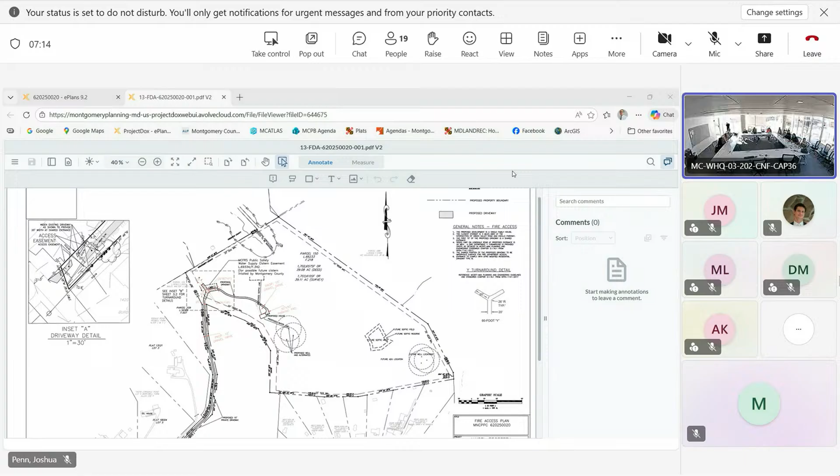There was a handful of comments, I guess, Marco, to go over and address as best as we can today. And then if we need to meet afterward or set up another meeting, that'd be great. I think I have it distilled down to maybe two or three big picture comments. One being the access easement from Frederick County that is currently used for the property, and then the area we were proposing to carve out of the conservation easement for a future potential ADU. So those two items - can we go to the forest conservation plan? Maybe that's the best way to go on this.

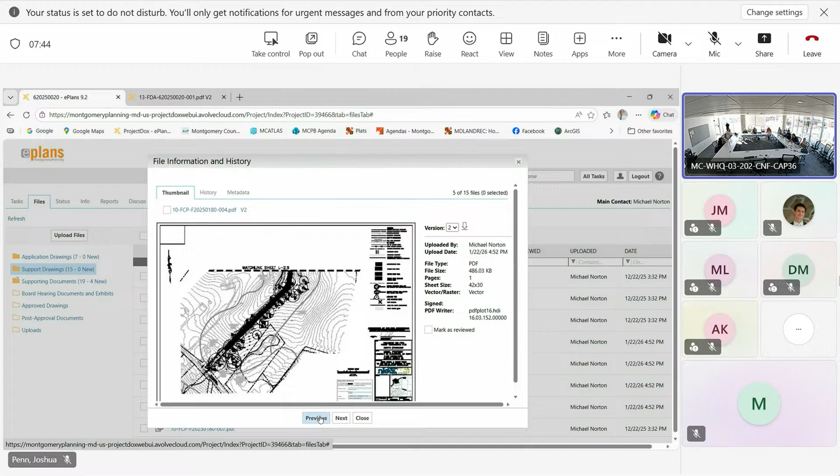Yeah, no problem. And I guess just while the plans are being pulled up, it might be sheet 3, if I had to guess. Sheet 4 then. No, I thought I had an overall in there that I wanted to use, but it's such a big property. Right here. So that looks...

Yeah, maybe. What we're looking at - it looks like, as best we can tell, there's not a problem with using the pipe stem as we have, but the concern comes in on the top north corner of the property, the access easement and forest, and potentially reforesting or putting that into an easement area. Is that...?

Well, at this point, there was something to this effect in the comments. It wasn't clear which of the two, or potentially both, would be supported. There's just not enough information provided yet. Okay, ideally there'd be one. Potentially you could justify two, but you would need to. We don't have a problem with the one that we have shown, which would be the pipe stem coming off of Lewisdale Road.

As we have shown, we're not proposing access from the easement from Frederick County. Would you, so you're saying you'd be willing to close that off? And if it would allow us to move forward, the owners would be willing to close that off. We spoke yesterday and they're fine with foresting that area, foresting the stream buffer that's on Montgomery County property. That's not a concern, we can definitely close that off. I guess that's one of the big comments that we have to work through or get some feedback from you.

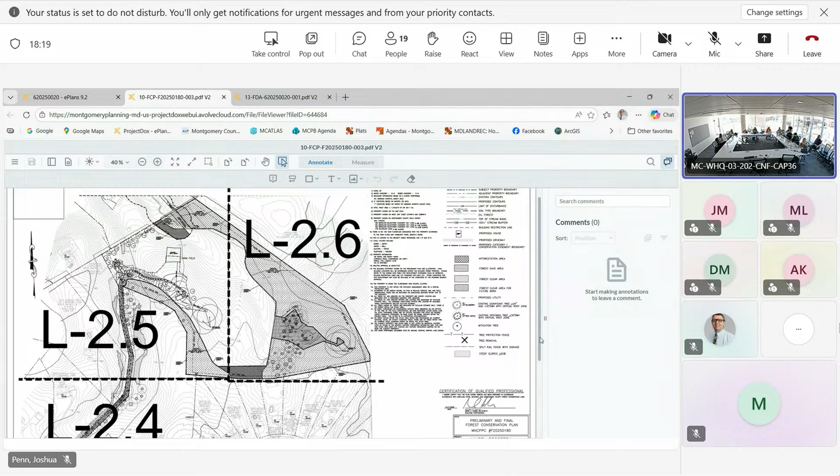I think that leaves us with the one entrance. We would like to retain the entrance that we are showing on the pipe stem. That brings up a couple of items that I'm trying to work through. We will set up the meeting with Rustic Roads and talk with them. I think, Jonathan, you had a comment about possibly doing a shared driveway.

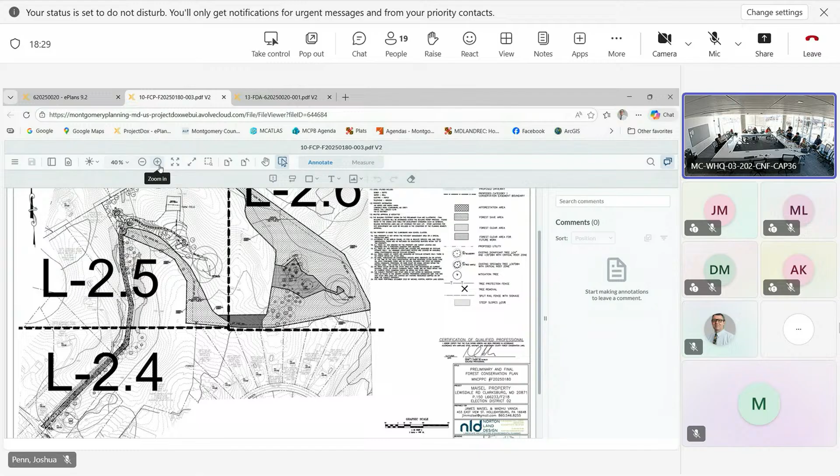Yeah, there's something on the adjacent plat that showed it was the access for this property, kind of stubs here - or sorry, this one stubs here, this one goes all the way to the road. But then it shows on the plat like a future 60-foot right of way. I don't know if that was back in the 80s when they were maybe looking at doing a bigger subdivision, is what I'm guessing.

I don't know that we could go and put the driveway on the neighbor's property to widen that, because I believe their driveway is 19, 20 feet from our driveway as we have it shown right now. So we'd have to somehow do the driveway on their property. You're talking about you would have to expand the driveway? Well, we'd have to completely move the driveway off of their property and put it onto the neighbor's property as a shared 20-foot wide driveway.

So we really would prefer not to do that. We are straightening out quite a few driveways at the entrances. It seems like everyone's driveway is on everyone's property when you look at the front of it. I think some of the circle driveways actually extend onto this property. That is why we're showing it 20 feet wide up in the front for fire code requirements, versus going to the neighbors and telling them to please remove all their driveways off of this property. So we'd like to keep that as clean as possible with a single driveway going back to this property.

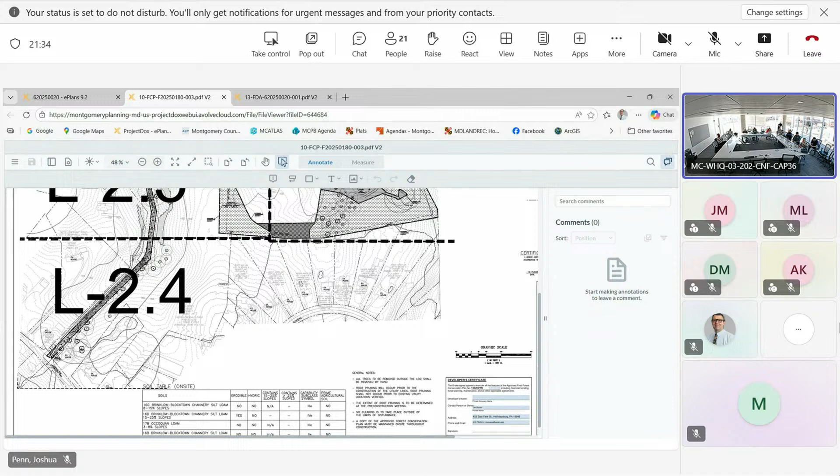That brings up one other question, and Marie is on the call right now. What I'm still getting turned around on this particular property is, it's been a long time since we talked to you originally on this, because we were ready for approval before we decided to go back to more testing on the property. When we did that, the code requirement changed - that requires now a cistern on the property instead of the easement. Correct, as of December 24th, easements are not acceptable for actual water supply installation.

So I want to go back to this for one second, not to debate it, but what I'm trying to figure out is in the code that was written, it says that if an acceptable water supply does not exist at the time of subdivision of any new residential development or redevelopment comprised of more than one or two family dwellings - we're one. So I want to reiterate that we're not two dwellings, so does that really apply to this project? This is one parcel that we're basically just converting to one lot so that they can build a house. So it's a little bit unique.

Not to muddy the waters, but if you continue with the ADU, does that further complicate things? That would be another question, because from what I'm understanding with these cisterns, we went from an easement to a $130,000 expense for one house.

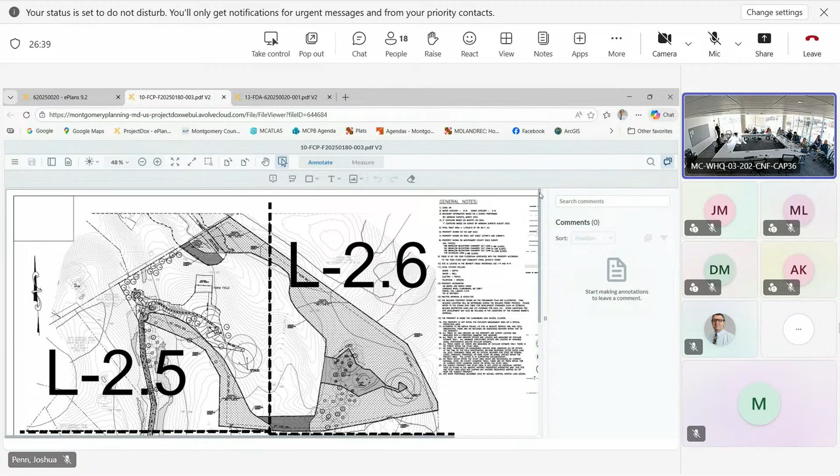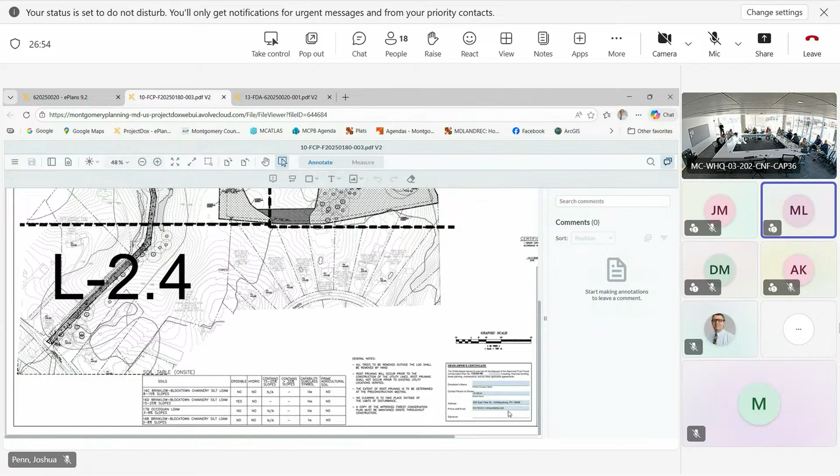Could I jump in real quick? If you combine a driveway that was not shared before and make it shared now, for the extent that it's shared, it will have to meet fire department access regardless of the age of the piece of property. Just adding that in there -- which means tertiary roadway depth standards, and that's up to the point where it's shared, and then after that it's different.

So we really want to see a detail -- I don't recall if you showed the detail of that area. Did you look at the sight distance requirements?

Yes, we did, actually we got a comment back on that. While we were doing our septic testing, our surveyor retired, so we've had a good time on this project. We do have a new surveyor that's going to check the sight distance for us.

I believe it was the vertical distance that we got a comment on, not the horizontal distance. We didn't have a problem with that. Make sure the vertical distance is met. If any of those don't meet sight distance requirements, even if they add on to their property, they can't use it. Those can remain, but they can't use it, so they'll need to find a place where they can meet sight distance requirements.

Something I think would be worth looking into: because the pipe stem is, except for the front, entirely forest clearing and clearing of various trees, and you're on highly erodible soils. If you could work with some of the neighbors' driveway, that would be helpful.

What would you want to see that we looked at? What would we need to provide to you? I suppose in your updated statement of justifications, you could explain what steps you took and how it panned out. All right, we can talk about that too, or it may be that there'd be a conflict.

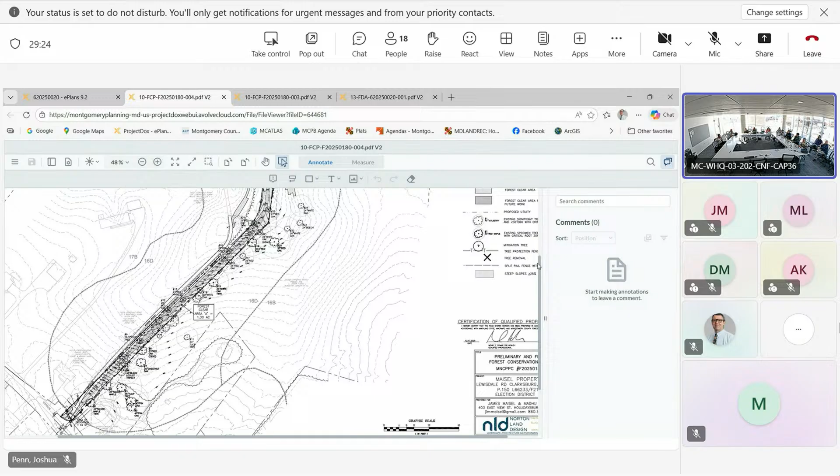This is just something to ask, I don't know if it could be explored, but if we somehow looked at taking that driveway from Frederick County and extended it to the property line, would you then not be involved, or does that just add a whole different level of complexity because we're coming in from Frederick County? So it's a Montgomery County address, right? It is, but your primary response is going to come from Montgomery County because it'll be in our dispatch system as a Montgomery County address.

So your first due is going to be us, which means that driveway apron should meet our requirements even if it's in Frederick County, because we're serving a Montgomery County address. Okay, so we would not be able to get away from a cistern? Well, I thought you told me you didn't need to do a cistern because this property existed. I'm just trying to eliminate the debate altogether. But I was just curious, I have not run into a case where we would access a property from Frederick County and how that would impact all of the other reviews.

Yeah, I had a commercial site years ago that had this exact condition, and Frederick County deferred to us. So it really wouldn't provide any benefit to the property owners if we did decide to go that way. All right, that kind of answers that question.

I think that covers us. Jim or Madhu, do you guys have any other questions at the minute? No, I don't think so.

Okay, as far as timing on this, it sounds like we have quite a bit to do before we can resolve this driveway versus the ADU versus the forest and all that. Do we just kind of keep going with this? I forget if we have the timing, because this is an admin case, so I'll never...

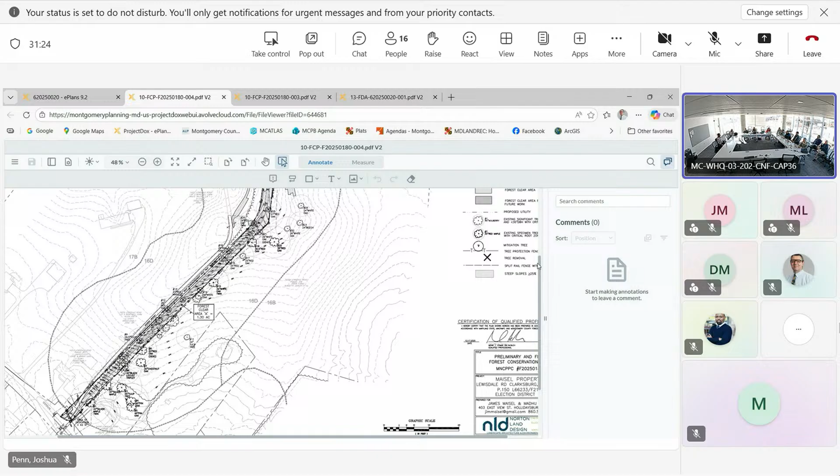Plan on submitting, so we're gonna have to go in probably with a pretty lengthy request to start, just to get this driveway we'll do an extension straight to the board. I think we're gonna have to, because I don't want to burn through one of them at 30 days, because I have a feeling we might need the other two. So let's go straight to the board. Jim and Madhu, we'll talk about extension requests offline on this.

Again, this was admin, this was preliminary, but it's not anymore. All right, I think that's all that we have. I think we have enough. All right, thank you, guys.

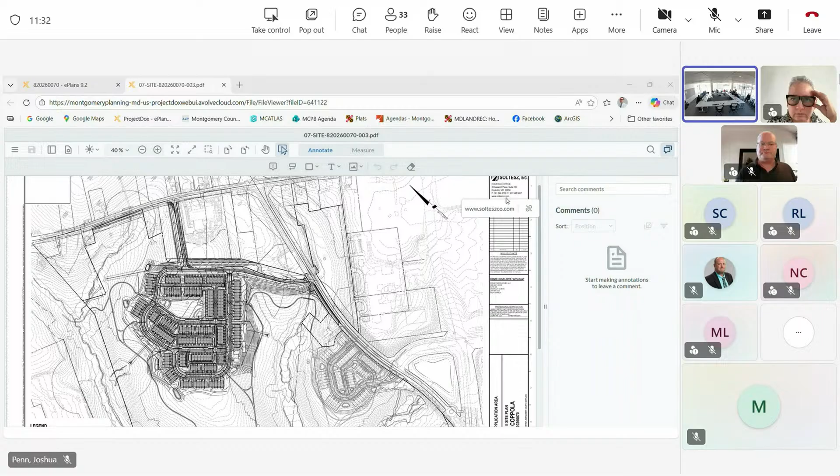Okay, so you're talking not about the B amendment, but the original certified preliminary plan? Well, the A amendment and the B amendment did not change any of this. The O amendment, which was the certified set, locked in all the grading and everything else we're looking at. But that hasn't changed as part of the A amendment or the B amendment, which were the only two amendments for this plan.

Okay, so we'll review the application. I'm pretty sure we did change the grading, that was one of the items we did. DOT did not approve any changes in the preliminary plan amendments to this particular section of the development.

Understood. Actually, now that you mentioned that, Rebecca, I don't see any DOT comments in our review because it's a site plan. We work with DPS, and DPS actually has the majority of comments, but they coordinate with us.

So the DOT comments are coming through Sam Farhadi? Yes, right of way as well. You see, right of way comments come from us, but in consultation with DOT. That clarifies a lot, because we weren't sure why we were getting some comments that seemed preliminary from right of way and not DOT.

They ensure our comments are addressed. Understood, so we can go through all of these and we will probably set up meetings to go over them separately. We had requested a meeting because we understood we didn't have a preliminary plan approval from DOT in this section, and we wanted to get in front of these items, but getting them right now is not an issue. We can get all of this addressed.

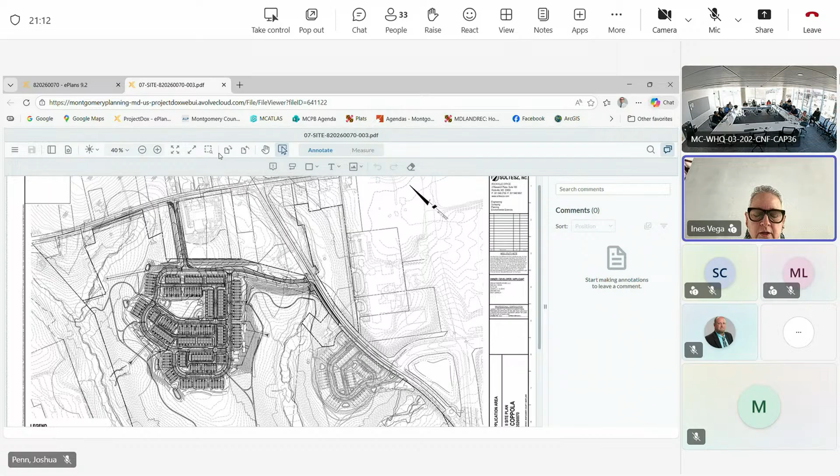There is a desire to not have that fire access. So for that, we did want to confirm that having 150 feet from the door to an accessible alley is okay, it doesn't need to be to a different street. And with that, we would move the biplexes, the only biplexes that face that central green, which is to the right of the screen being shown right now, or to the right of the central green at the bottom of the screen that's being shared.

Josh, if you can pan up. Yep, try and hold on one second. Okay, no worries, sorry, what were you talking about?

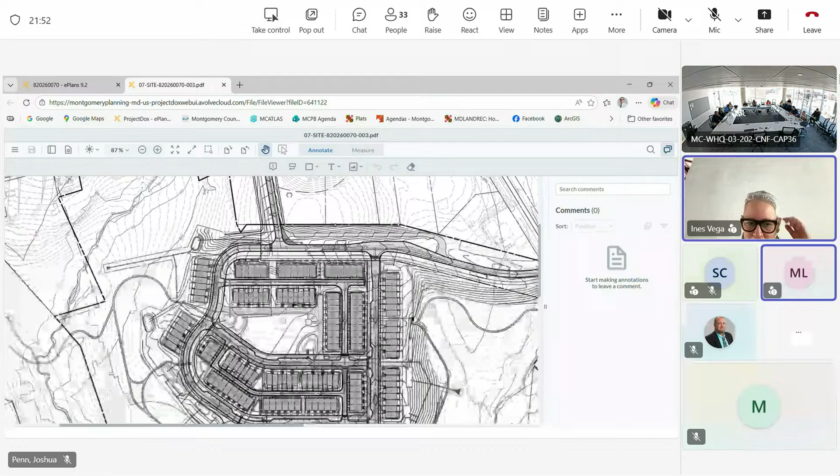So the 150 feet is to every front door from the same point on the alley. That would work, but you cannot split access. So where the truck stops in the alley, if you can get 150 feet to every front door on each of those two townhouse sticks, that's fine. And then again, the biplexes have to meet 150, or you can shift the biplexes somewhere else.

Okay, yeah, we did not have it from the same point on the alley, on both sides. We can achieve the same point if we break the sticks up. If we add another break, I can achieve 150 from the same point. Can we achieve them from the ones that are going up and down as well? Yes, yes.

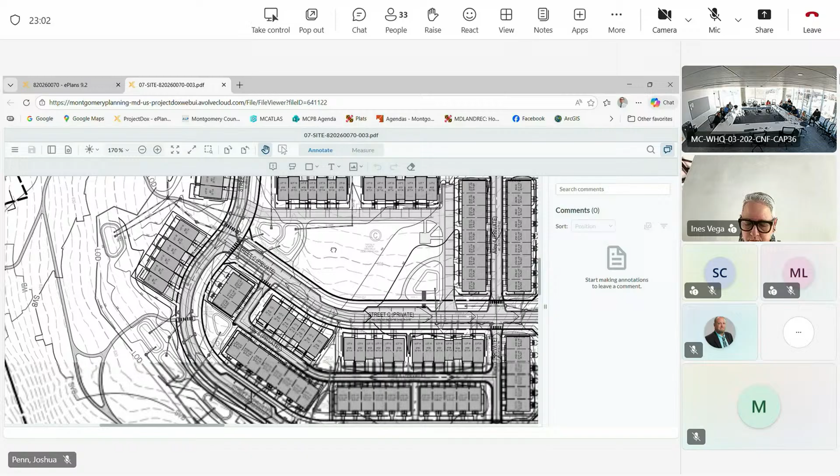I don't see who from staff is here, but I believe Roberto is present. So we would probably move that biplex that's on the right of the green to fronting Street B. Josh, do you mind panning down again, please? Where are we going? Street B. Right there, where it says Street B private, we would move the two sticks of townhouses that are facing Street B private to the front of the green, and make this the biplexes.

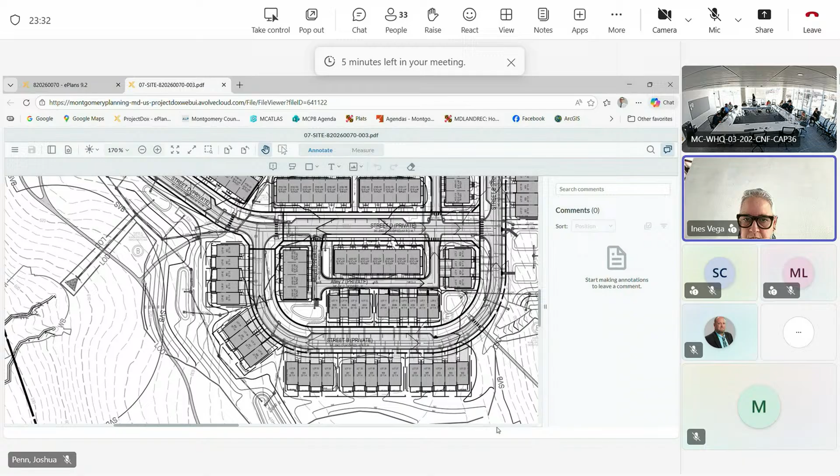So we would be moving these 10 townhouses to the green and moving 9 biplexes to here. Again, we were wanting to distribute the units amongst the unit types all around. This puts a lot of biplexes in this area. I don't think that is an issue market wise. We were just trying to follow the principles of mixing the unit types and going into lesser density as you go out from the access to the community. So we should be able to address it, and we can have separate meetings for that.

That works. Ines: I really appreciate you looking at that central green and looking at ways to eliminate the fire department access on the central green, and that we had suggested to look at those biplexes and relocating them elsewhere.

So we appreciate you looking at that as well. We had suggested potentially looking at private street C as the place where you have townhouses currently. Did you look at that too? Yes, we did, and we can present both studies. Stephanie did it, we end up two or three units short. Oh, I see, yeah, so that's what my first desire was there, because it completely made sense to frame this area, but we ended up short.

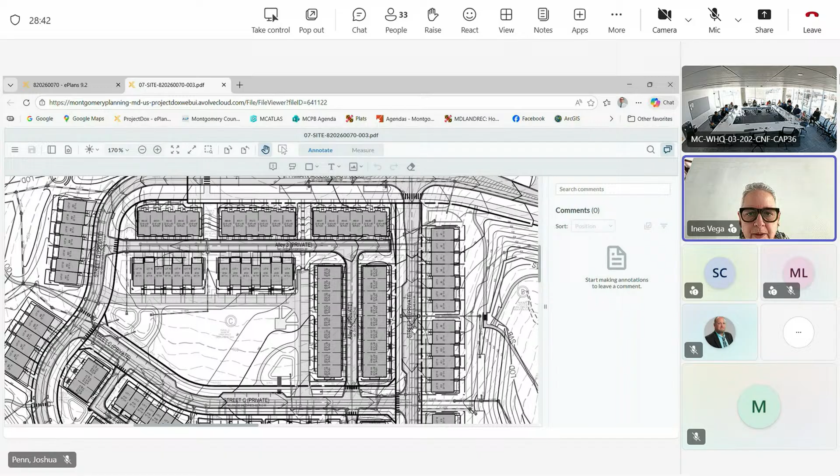Because of the distribution and how it would go to the back, the building would drop into the unit. The biplexes are an in-ground front, which is ideal, but with the front garage you lose half of that footprint, and dropping that wall within the unit makes it incredibly expensive to build. We're trying to keep some affordability with a slab on grade.

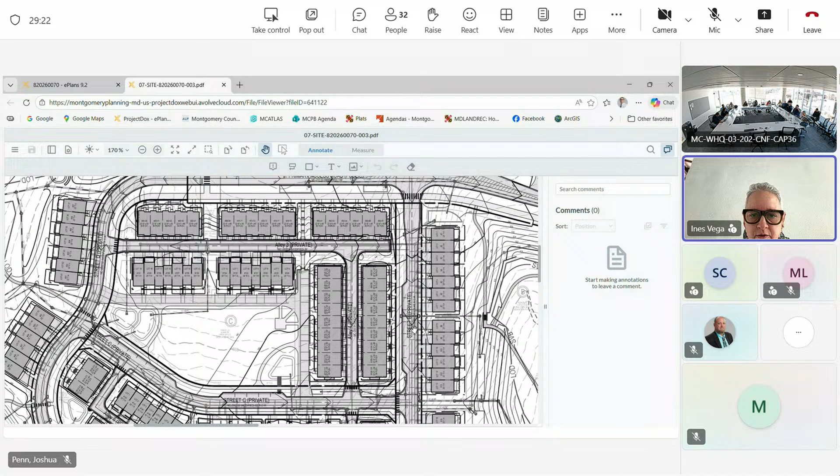But if you look at these slopes, they have barely any retaining wall. The retaining walls start between the first and second stick of townhouses, and only go to the stream valley buffer, with no retaining walls along the back of that slope. There used to be 20 and 30-foot retaining walls there with the certified plan. So we did take a very good look at grading, and we'll take a look at it again.

With the stormwater planters in that back area, we are not able to do it without stormwater bioplanters. Again, something the builder would love to do. We did see that comment from urban design, and we'd love to see that become a different type of bioretention area, but it's really not feasible given the whole engineering of the site.

We took the time while doing the CRT site plan to really look at what you're seeing on the site plan here, to make sure engineering-wise it made sense, and we weren't just proposing something quickly and getting stuck trying to get it approved for engineering permits. We did try to remove these four bio planters and make them retention areas, but it's just not possible.

Okay, I'm sorry to cut us short here, it's almost time. Does anybody else have anything important they want to bring up before the end of the DRC? No. So do you have any closeout questions that you need answered, or any scheduling follow-up?

We will reach out to figure out all our design comments and how we plan to address them. Josh, all your comments were pretty straightforward to make sure the plans made sense. Marie, you'll be seeing an update from us, and we'll make sure we're looking at everything the way it needs to be. My one question is we do have comments that are really building permit triggers for the phasing.

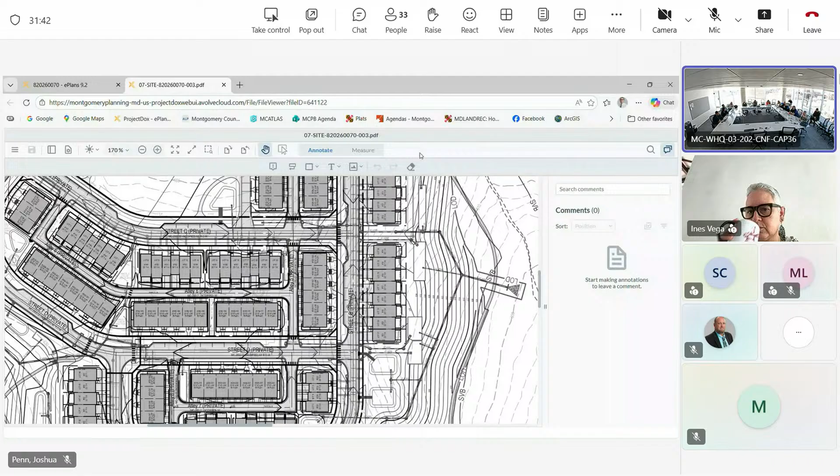Because I think we're going to have to have another conversation about that, because a lot of the stuff that was triggered to building permit really has significant impacts to the design and layout of the site plan, and whether it meets the site plan findings and whether it's safe, adequate, and efficient.

So if we need something now, even though the trigger was building permit, we will need it now, because we can't make the site plan findings without some of those. So let's schedule a meeting on that also. And by the way, we already have a lot of this information, we just need to update it to the site plan. So we'll start all those submittals as well.

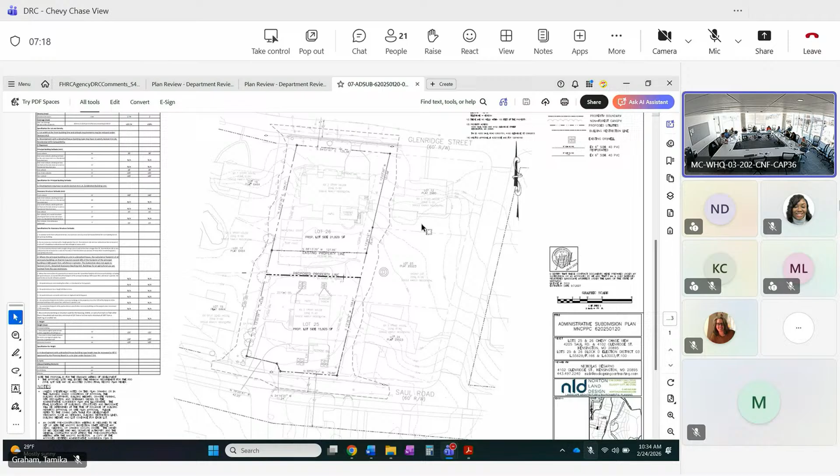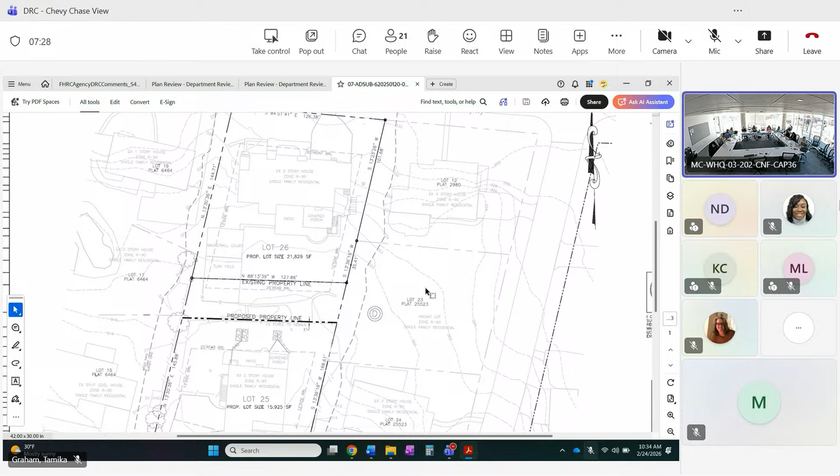We did go back through and look, I'm gonna have to talk with the previous builder on Glenridge about this sidewalk. I thought that the sidewalk was waived on Glenridge, but I don't know. I did not have a minute to go back through and find any of the approvals, and maybe Sam, you couldn't? Yeah, we looked into it. We couldn't find either. Well, the street doesn't have a sidewalk.

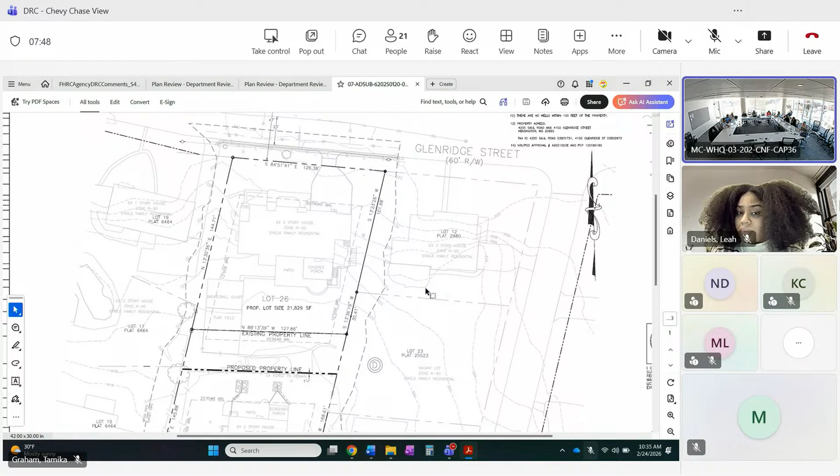No, I understood. It was a condition of approval of the previous subdivision that a sidewalk was to be installed along Glenridge unless waived. Sorry, on Saul Road, the sidewalk's on the other side of the road. Yeah, but the condition of approval previously was that it should be installed. The conditions when Dan did the subdivision, Nick, right, was that sidewalk was to be installed.

I could not find that that was addressed previously, and the county, DPS, is saying the same thing, that it's not, that they're asking how was that sidewalk not installed? Well Nick, what I'm thinking we're going to have to do is circle back to Dan on that and talk to him for a few minutes, because we got the entrance permits, we got our driveways, so it would have come up in that review.

I checked with the plat reviewers for your information, Mike, and they did not see the amended DOT letter. The original one didn't call for it. They deferred everything to the town of, or village of, Chevy Chase View. Right, that's why it wasn't. So now we're gonna deal with that.

If I'm reading this correctly, it looks like the big condition in the comments is the potential for additional dedication based on the complete streets guidelines, which came in following the last subdivision we did on this property. And that we would have to seek a waiver for that. I guess that's what I'm trying to figure out, because we can't dedicate, the houses are existing. That would put us, I believe, in violation of the setbacks.

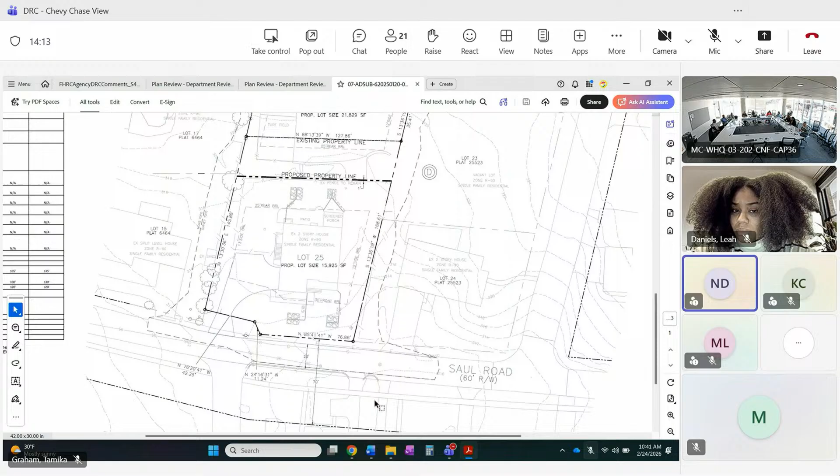It doesn't look like you have much room to put a sidewalk along. We don't, right, and I really don't want to go to the neighbor and ask them about putting a sidewalk in front of their house either. I mean, the whole street on that side, there is not a sidewalk. The sidewalk on Saul Road is on the opposite side of the street.

The intent is to eventually have sidewalk on both sides of every road, and you gotta start somewhere. We have to start somewhere, and at a minimum, I think we need to have the dedication to not preclude the ability to have sidewalk in the future.

So I think it needs to be shown on the plans. I think part of what Leah's comments were about is we don't have a cross section, so it's a little hard to understand. We basically took our plans that we had and moved a lot line, is what we were hoping that we could do with this. And then this came up.

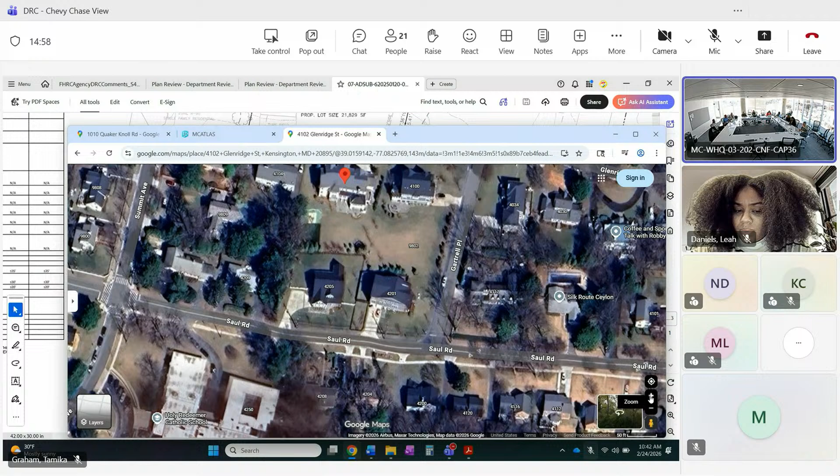Nick, we're gonna have to go back to Dan and talk to him about what had occurred on this property and how we got to where we did.

Was there an improvement plan for Saul Road that wasn't the town? Saul Road is county maintained. The one side of Saul is Chevy Chase View, the town of Chevy Chase View. The other side where the sidewalk is, is the town of Kensington. We maintain Saul, you maintain Saul. I feel like we had this discussion the last time we did the subdivision on this, and they got really confused on Saul Road.

There's a condition we don't know what happened to, and I think that's what we're looking for. We need to solve that, try and solve that, and best case we get this waived. Worst case, we try to figure out how to put the sidewalk in there, Nick. So we have a little homework, but I think the concern right now is how we're gonna solve that sidewalk issue. Otherwise everything else is just some forest worksheet and some minor things.

Nick, I think we're gonna have to have a call possibly with Dan to solve this, if we could jump on that. They're not saying we have to do it, we just need to answer some questions about what was done previously. So is the worst case I have to put a sidewalk in from corner to corner on the property? Potentially, yeah. Worst case you'd also have to put it on the neighbor's property.

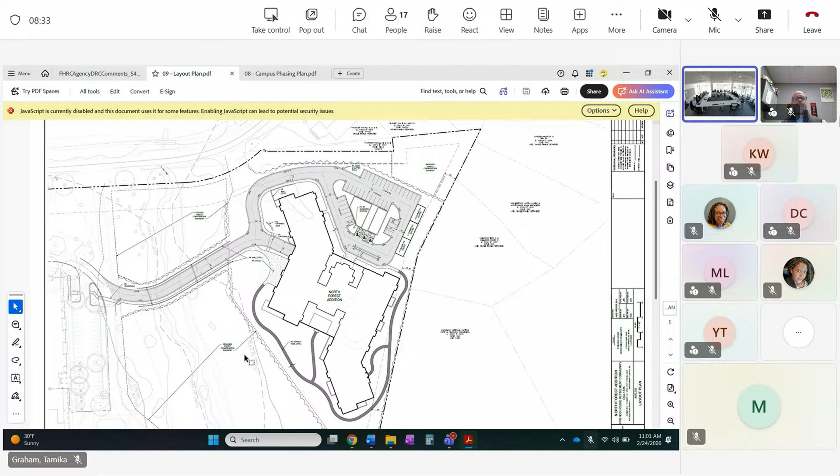So we've listed out road design - we need to see how you're going to minimize forest removal, how you're going to minimize impacts to the floodplain and to the Stream Valley buffer.

Also, mitigation has to be provided. I don't think that was clearly laid out again for the approval. And our team has also noted some existing forest conservation compliance issues, a little bit separate but also tied to this approval.

I know we need to circle back here, but before I turn over the floor to you, I'm going to point out a couple other things. So that's the road from the environmental perspective, and then from the transportation perspective, again just a list of things we need to complete our review.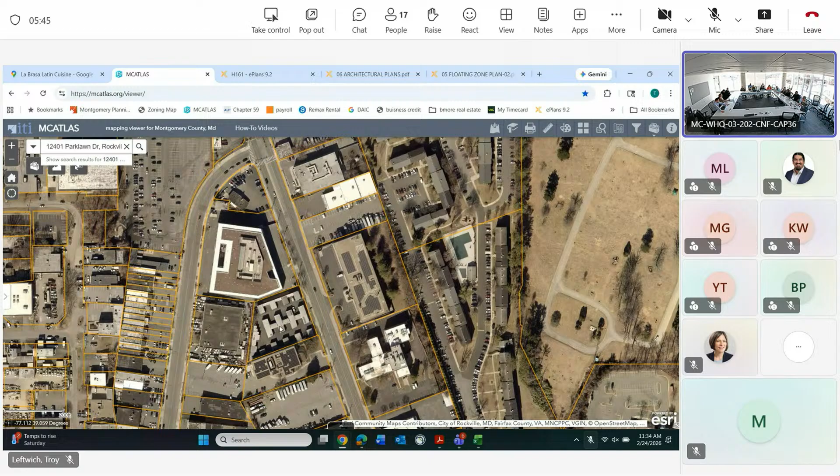All right, so like Neil said, this is a local map amendment for self-storage. The existing zoning is IL with a FAR of 1, and they're coming in for a floating zone, ILF, increasing the FAR. Height is staying the same at 50 feet. The property itself is existing self-storage, currently serving as a self-drive up facility, a dated facility, and it looks like the applicant is essentially trying to update that facility with a larger, more enclosed building.

So you've seen our comments. I think most of it is related to making sure the site's tight, so we wanted to make sure the fire access wasn't going to be problematic at that site. But that's kind of all our general comments - it's essentially setting up the stage for issues we may be dealing with at site plan, so the way we can essentially deal with those things now, the better, so that process in the future will be with less constraints.

So there was opportunities for maybe building placement, shifting the building back, maybe putting that amenity open space that's required in the front - that might also address some parking concerns or opportunities. I know y'all are doing a parking waiver. I think that kind of overall hits the major issues, at least within the DRC comments, and I'll turn it over to y'all to determine what other comments you may want to address.

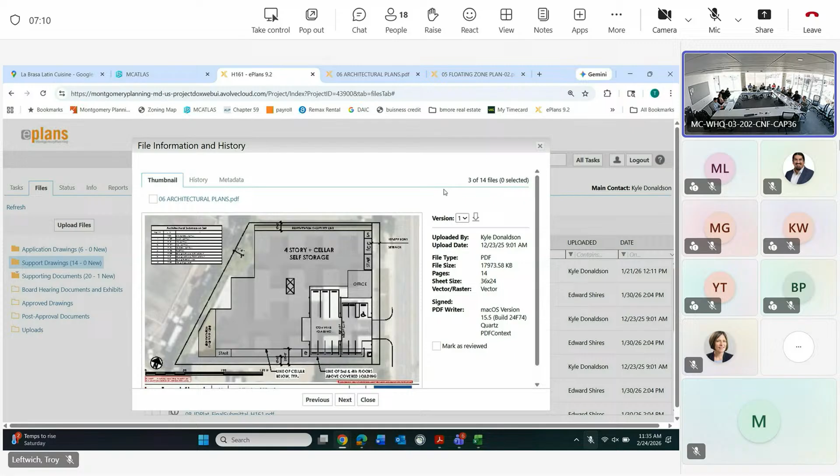Great, thanks again for the comments on this one. We're excited to be able to reinvest in what is a very dated, aging self-storage facility in a manner that will really support the expansion of 495 Movers, a strong local business, but also help implement a lot of the county's urban design objectives and reinvest and improve the existing site. With us here today we have Nate and Tom with 495 Movers, and then Pat and some of our team members are also online.

So thanks again for the comments. A lot of them, like you said Troy, were pretty straightforward. Amenity open space, we saw those comments and we'll look at it further.

One thing we wanted to note in terms of constraints, there was a suggestion to move the building back so we could get more space at the front to accommodate amenity open space along the street frontage. Because we need the 10-foot walking path for fire access all the way around the building, it really precludes us from pushing the building further back. Like you noted, it's a very tight site, but we appreciate the different options you suggested to explore.

So we'll look at that further in terms of what we could do to enhance either the access or the design of the amenity open space, and circle back with staff once we've had a chance to look at that further. There were a few other things we just wanted some clarity on.

There was a comment regarding the side path. We saw the bicycle master plan recommended a side or separated bike lane along this stretch of Parklawn. For those separated bike lanes it was recommending a side path, but it actually looks like that's on the opposite side of the street. So our frontage improvement was just following complete streets guidelines here. We just wanted clarity that everyone agreed on that.

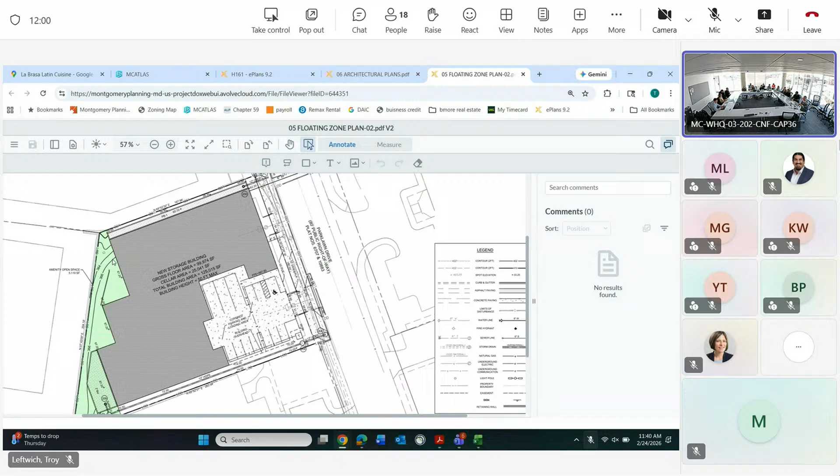And then the last comment we wanted to chat with everyone about was the driveway alignment. We'd seen DOT's request for the driveway to be aligned with the entrance across the street, and certainly understand this is a goal of many projects. We didn't think that made sense here for a couple of reasons. We wanted to point it out and then have a conversation about it.

One is we're already improving the situation. We're taking what are 2 curb cuts today and consolidating that into 1 to minimize the potential conflicts.

This site is a very low trip generator. The roadway is a 4-lane road, and given the width of the driveway across the street, we felt like ideally you'd want those aligned so the 2 driveways communicate with one another. But given the width of the roadway, even if they were directly aligned, that wouldn't really occur here. Additionally, if we located it in the center of the site, it would impact our ability from an urban design perspective to provide activating uses with the building, because you'd be bifurcating the building straight down the center with small slivers on either side, versus having the ability to provide what we're currently proposing as an office activating use on the ground floor.

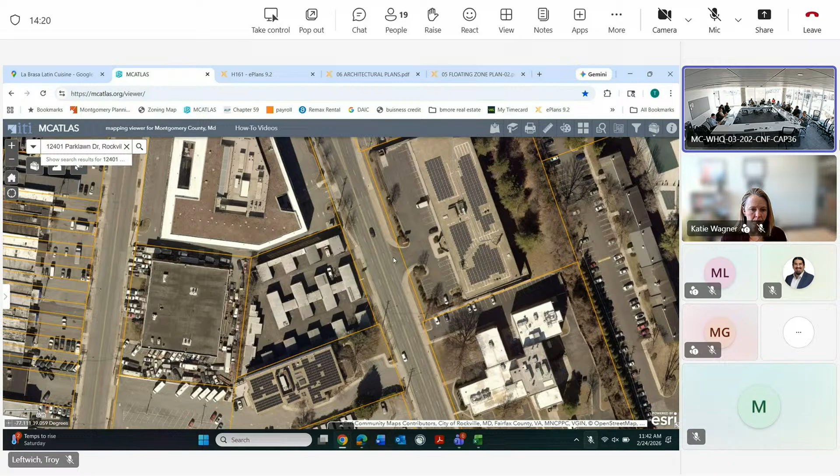Right, so we can just explain that - it's not for anybody else. The storage facility, initially as they're in a lease-up period, will have a portion open to the general public. Eventually the goal is for the entire building to be used exclusively by 495 Movers.

So we'll want to see how you coordinate, because obviously there aren't 5 places for 5 trucks to sit there. What size are the trucks? How do you handle the operation, the details about how they'll control the timing of the trucks coming in?

And what's best, do you want that as a separate letter or narrative? Yeah, you can provide that in a separate narrative.

It makes sense to provide some type of loading circulation plan now, since it seems like it's not your typical pickup. They can provide some loading and truck turning information, but we also want to know where the trucks park - you have 3 loading spaces, are they just going to sit there, or are they going to go into the building? Just a little more information about how it works.

We'll combine that with the information about the site location in terms of the curb cut.

Anything else, Doug? Hi, this is Carlos Pazmina from the Transportation Plan Division. I noticed you didn't submit any cross sections for the site - I did see the cross sections for the bioretention. For your next submission, could you please provide the full right of way, the sidewalk, and the overall layout of the site? Thanks. Yes, we will.